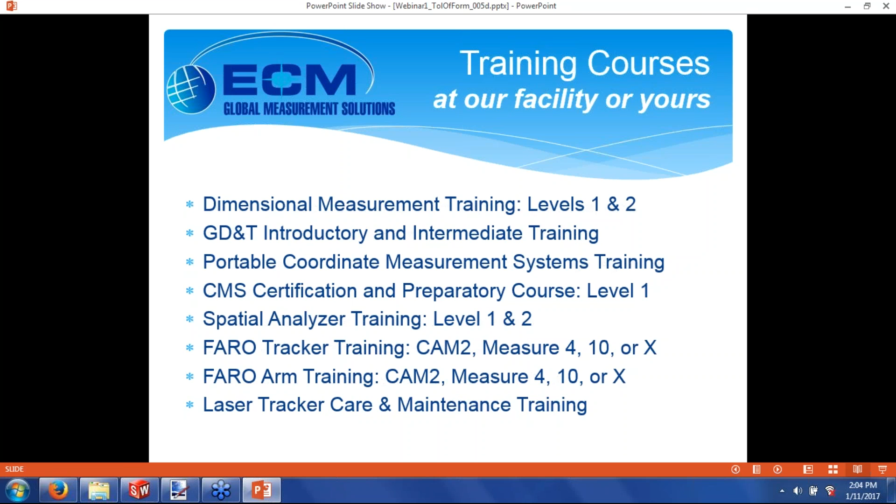Okay, on to the real subject matter. By the end of the webinar, you hopefully will be able to describe the shape of the flatness, straightness, circularity, and cylindricity tolerance zones and the relationships to datums. Quick hint, they shouldn't have any relationships to datums. They are called out independently of datums.

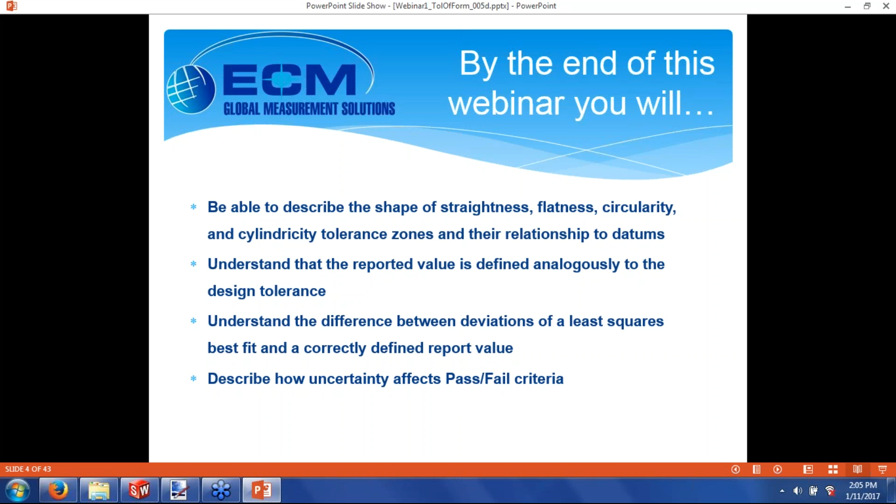Hopefully you'll understand that the reported value, the value we report, can be defined analogously to the design tolerance. Hopefully you understand the difference between deviations of a least squares best fit and a correctly defined report value. And hopefully you'll be able to describe how uncertainty can affect your pass-fail criteria.

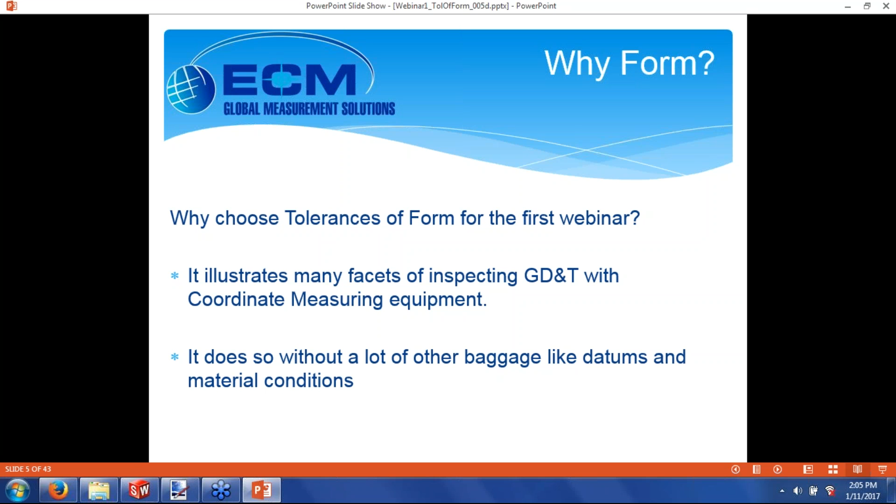Okay, why form? Why choose tolerances of form for the first webinar? It illustrates many aspects of GD&T inspection when you're using coordinate measurement equipment, and it does that without a lot of extra baggage and considerations, datums and material conditions. So we can really just focus on the tolerance zones and measurement.

Another aspect of why form. Why do these tolerances exist? What are they used for? A lot of times they're used for sliding or sealing surfaces. Straightness and flatness, roundness, they all kind of control smoothness to a certain extent, not on the surface texture level, but on a gross macroscopic level.

Important for sliding and sealing surfaces. Parts that mate by insertion. You'd like round parts to be round, so that when you put one inside the other, an oval part might not fit if it's a tight mate.

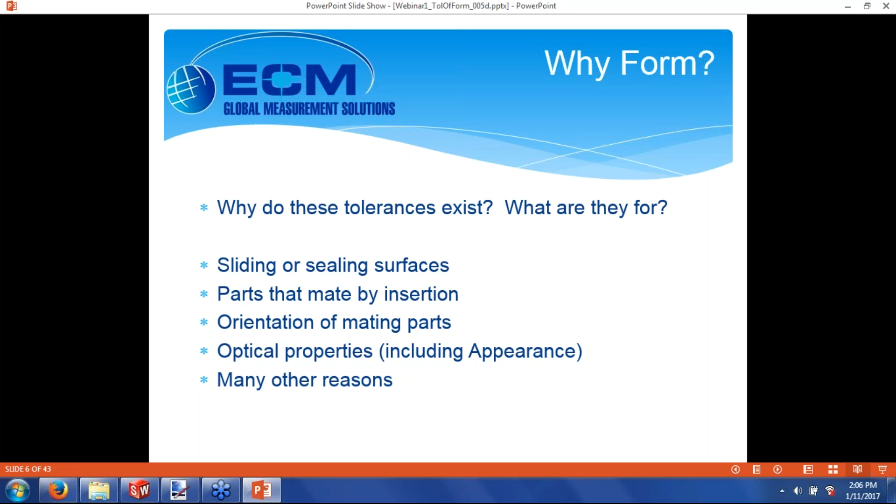Controlling orientation of mating parts. If there's a big bow in a surface that another part mates to, that mating part may be pointed up or down slightly compared to the kind of average surface, and that may not be what the designer wanted. Optical properties. If you're making mirrors, you may want that to be dead flat or have some other shape, and a whole host of other reasons.

Specifications. GD&T is controlled in the United States by ASME Y14.5, 2009 edition.

ISO breaks the subject matter up into dozens of individual specs, and I don't know them all. Functionally, ISO uses pretty much the same symbology that we use for the ASME spec, and the meanings are pretty close to the same. There are some fine differences, but in general, you'll be safe if you interpret a drawing that references the ISO spec.

If you interpret it just like 14.5, reasonably safe. A couple other good documents and specifications: Y14.5.1, that's 1994, is a mathematical definition of GD&T. Really good for people who can do vector math, but there's also some good material in there that may help explain what they were really getting at when they wrote the 14.5 spec.

Y14.43, gauges and fixturing for GD&T. I find this one really useful, particularly for thinking about datuming. It explains how to build gauges, taking into account various callouts you might have on a drawing that you're building a gauge for.

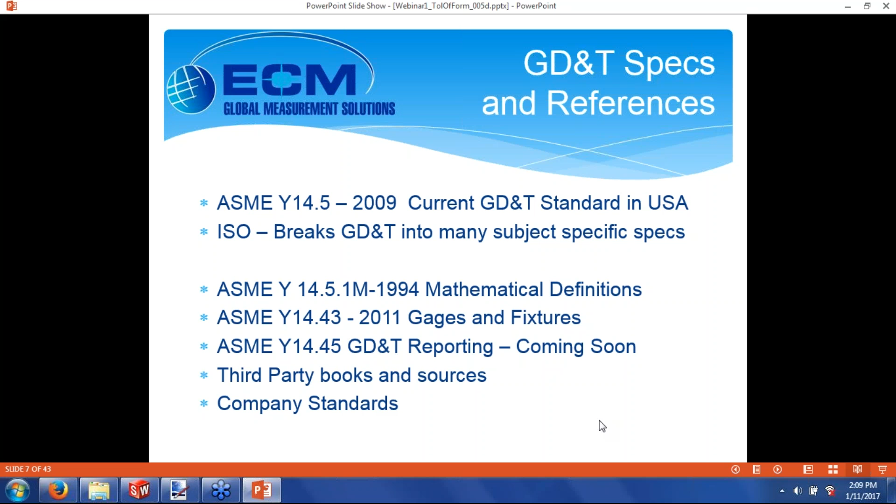Company standards also can sometimes control GD&T. They may have particular uses they want a designer to use, for instance.

Okay, tolerances of form. There are 4 tolerances of form, and we see them here accompanied by their symbols: straightness, flatness, circularity, and cylindricity.

The symbols look kind of like what they represent. The straightness symbol is just a straight horizontal line. Flatness looks like a square plane in an isometric view. Circularity is a nice circle. And cylindricity looks like maybe a shaft being rolled between two planes. That kind of similarity between what you're trying to control and call out and the image is carried through most of the symbology used.

Another note: profile can be used to control shape, but there's a lot more that goes into profile, including referencing datums. We'll talk about that hopefully in a future webinar.

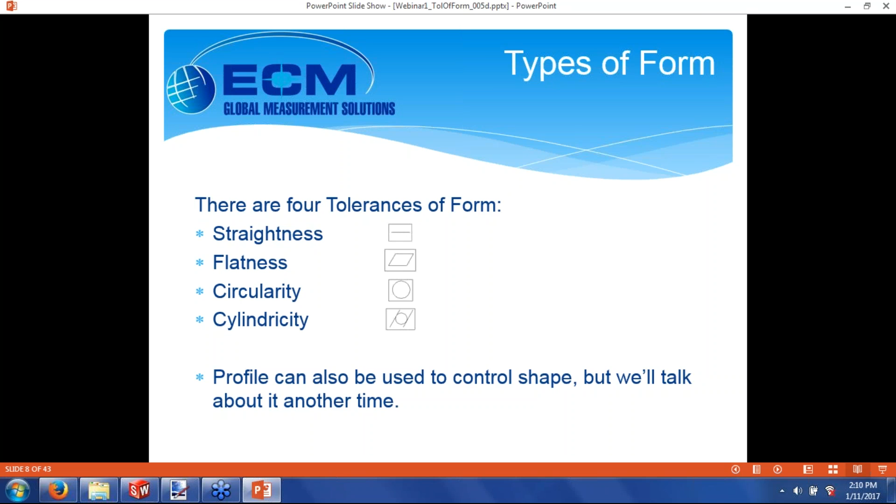Okay, all tolerances of form control shape by establishing an acceptable envelope of deviation, and they're applied without reference to datums. You're just checking the shape to itself.

This makes them particularly well suited for the CMM, because we tend to measure a bunch of points and then best fit, and that best fit is allowed to move in any direction, which finds your measured value without reference to any particular datum. You kind of datum them to the feature itself.

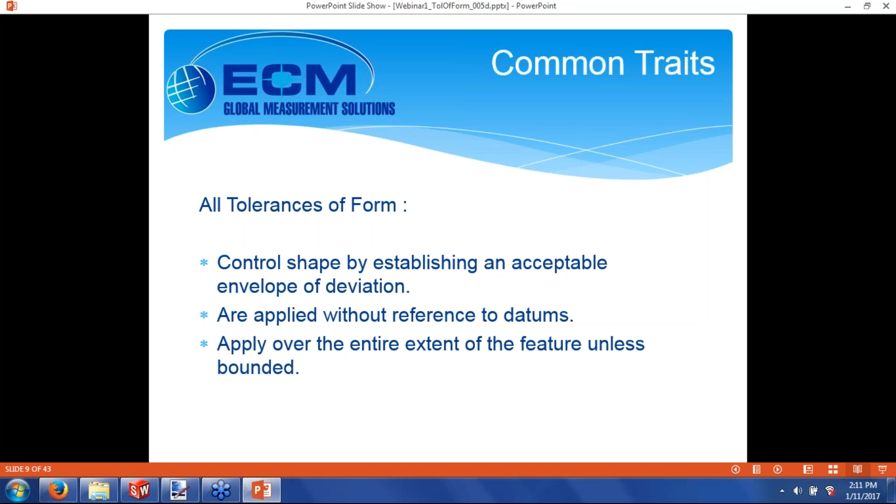And all tolerances of form apply over the entire extent of the feature they're called out for, unless they're bounded in some way.

So hopefully for the designers out there, you'll never write a tolerance of form with a datum attached, as shown in the right-hand view.

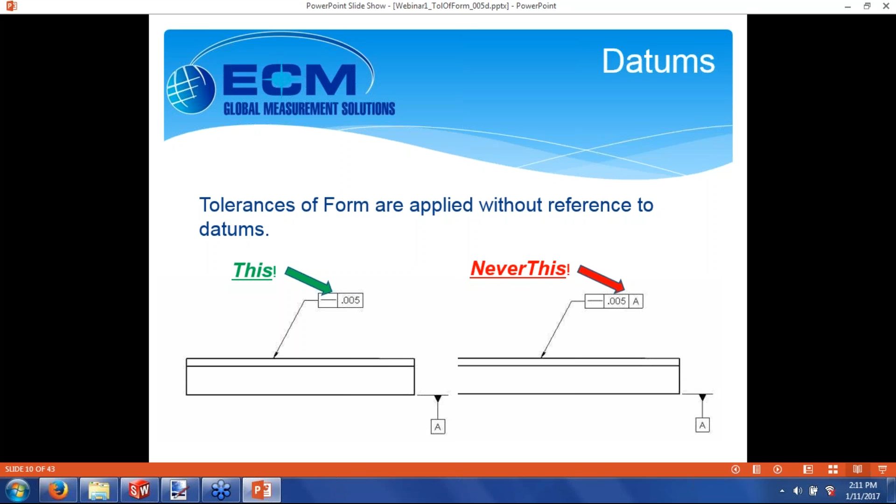And most of the CAD software out there is smart enough to know now that if you're tolerancing form, it's not even going to let you put a datum in.

Okay, by definition, the tolerance zone for straightness lies between two parallel lines in the plane of the view, and this is a direct quote now: where the elements to be controlled are represented by a straight line.

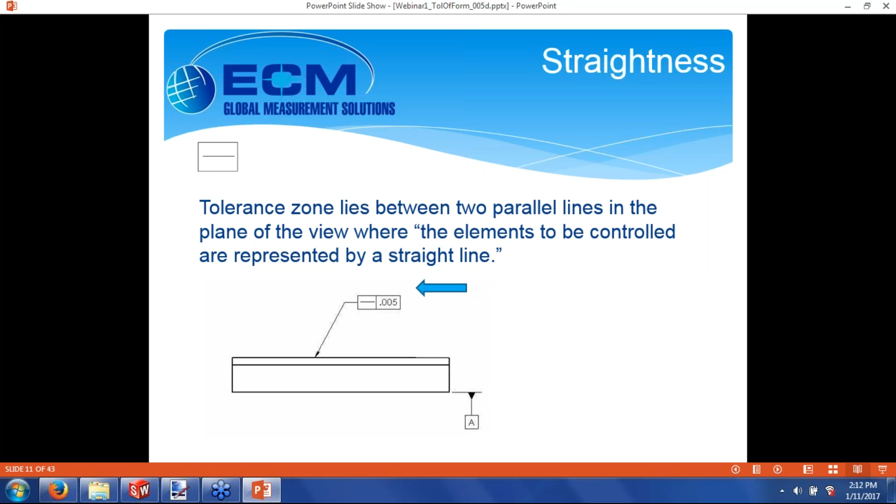So for this, I have a bar here with a chamfer on the edge, with the straightness callout along the top edge.

The straightness applies to each element across the entire surface in question. An element is kind of like a cross-sectional cut. In the case of a rectangular bar, you'd have a number of lines running down parallel to that front face.

Old school, you would take a dial test indicator and run it down the part, look for the minimum and the maximum deviation, and that's what you would record as your straightness.

Similarly, for a cylindrical piece, you'd have an element on the top. Since it applies across the entire surface, you'd have to rotate it, and you'd end up with multiple elements down the length of the piece.

How many elements are in a surface? There's an infinite number. They could be as close together as you could possibly take them. Part of the art of measurement is determining how many are good enough, how many you need to be representative of the part.

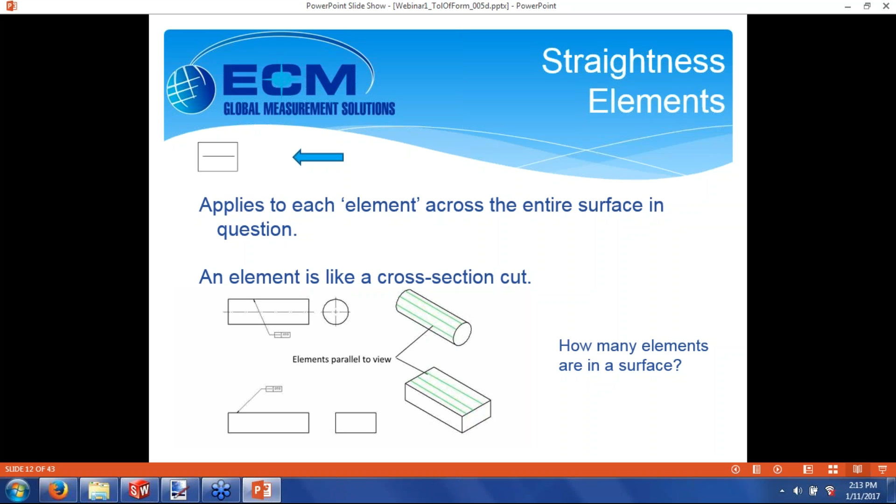Kind of zooming in. We've got our straightness tolerance at 5 thousandths. The tolerance zone is two lines bounded by 5 thousandths. Those lines could tip up or down as you move from left to right. The only requirement is that the actual surface falls within those two zones.

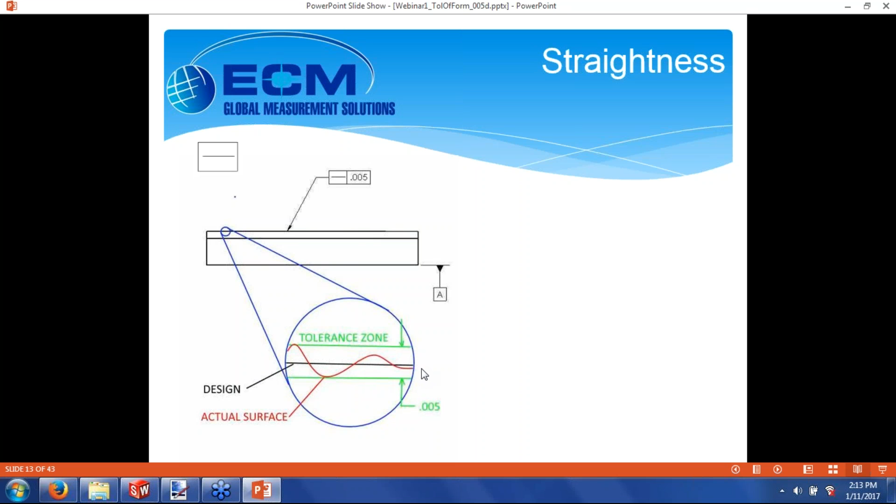Straightness can be applied on a per unit basis. In this image, whereas the callout on the right would apply over the entire feature, this callout per unit length, shown by having the slash and then the unit of length on the right-hand side of the slash, it kind of replaces a note: the part must be straight within 5 thousandths of an inch per every 1.2 inches of length.

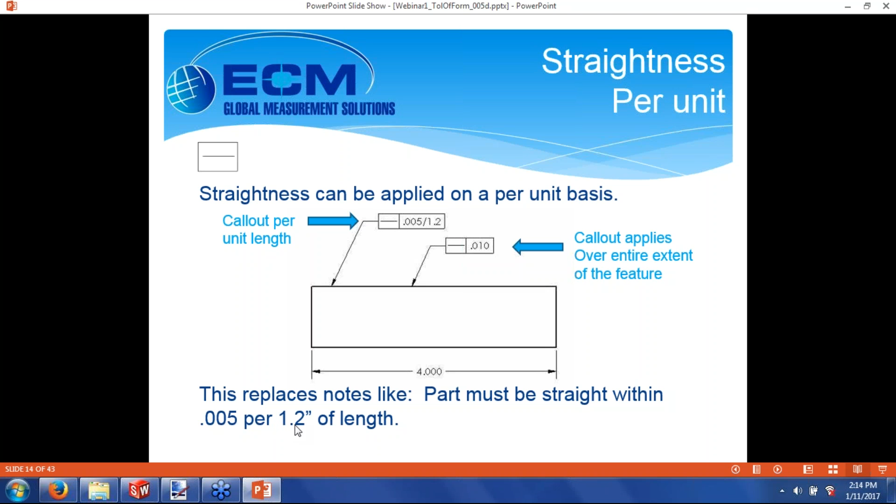What this works out to is you'd subdivide the surface. Every 1.2 inches, you would look at the straightness of each individual segment. Unfortunately, that could be divided any number of ways. Per the spec, you have to look for any segment 1.2 inches long that deviates the 5 thousandths of an inch in order to make sure that a part's conforming.

Software can help quite a bit. Otherwise you'd have to do like a running total of every 3 points you measure.

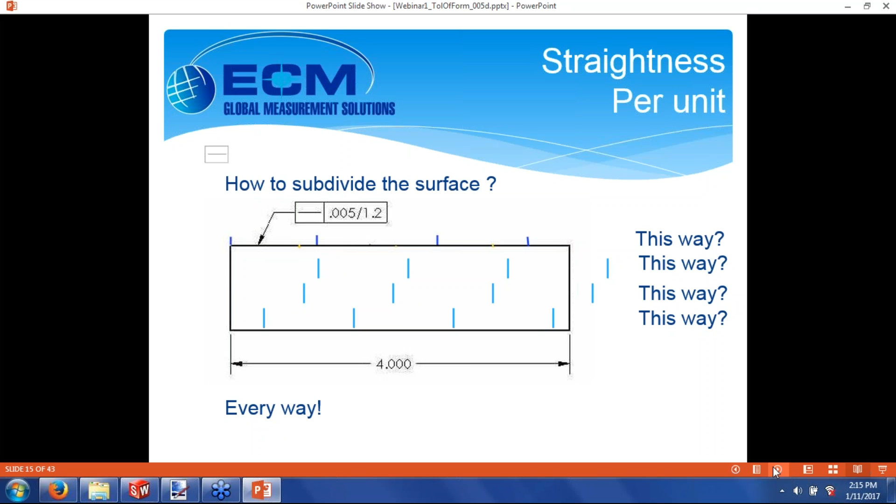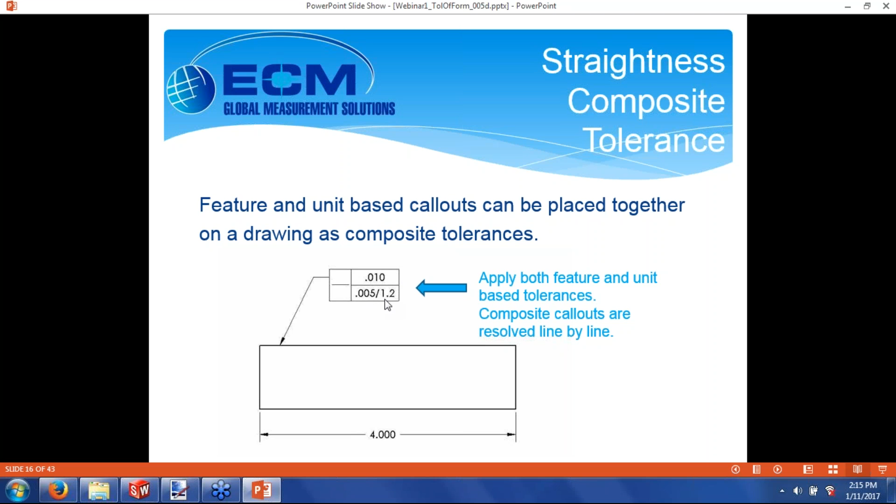Composite tolerancing. Sometimes you can combine a feature and a unit-based callout as a composite tolerance. In this tolerance here, there's just a single tolerance box, a regular tolerance on top and a unit-based tolerance on the bottom. This would mean just about the same thing as called out in the previous slide.

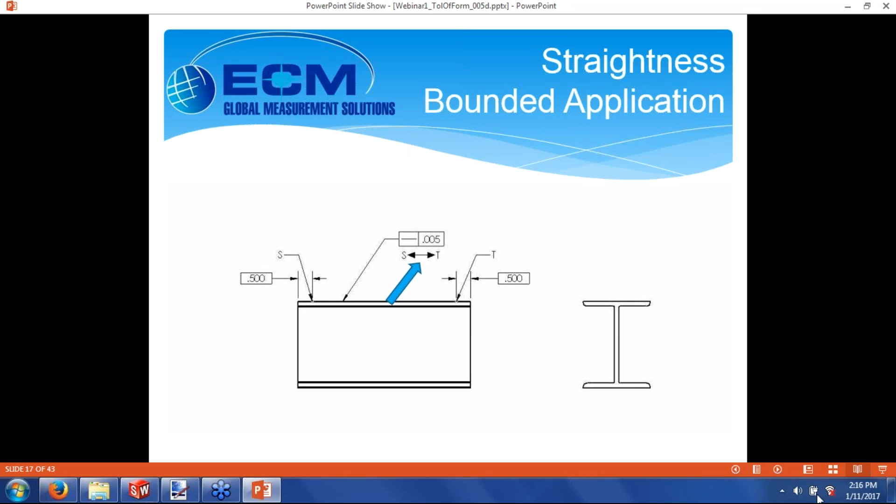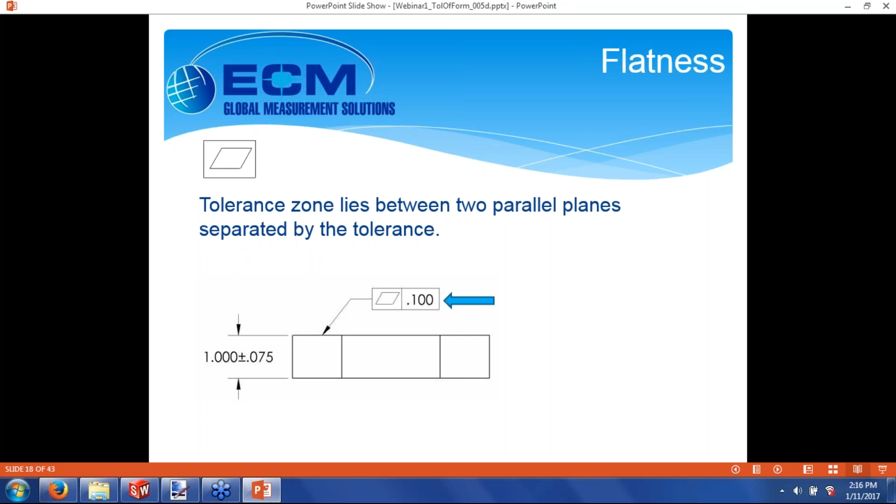Moving on to flatness. The tolerance zone for flatness lies between two parallel planes separated by the tolerance. For this callout, we'd have a 100 thousandths thick tolerance zone. It would lie over the entire extent of the feature. This is our controlled surface.

Zooming in, we have our zone, and the actual part with its variations. In order to conform, its highest point would have to hit that, and then the lowest point would have to be within the bottom tolerance. Again, that tolerance zone is free to move up and down to hit the highest or lowest point. Once you've touched off on one side or the other, it needs to stop.

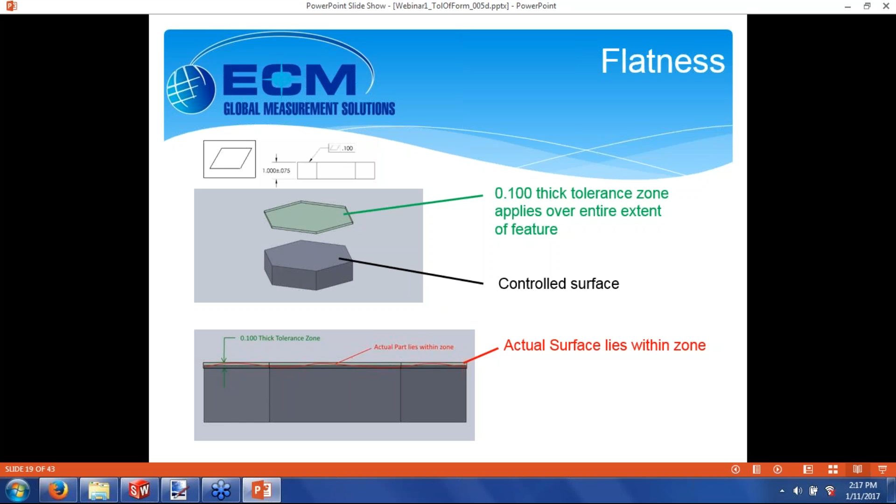It's even allowed to pitch and roll and rotate in order to encompass the surface, but the entire surface has to lie within that box after you're done. In some ways, you can think about flatness as straightness, but with elements running in all directions—longitudinally, across the piece, and even diagonally.

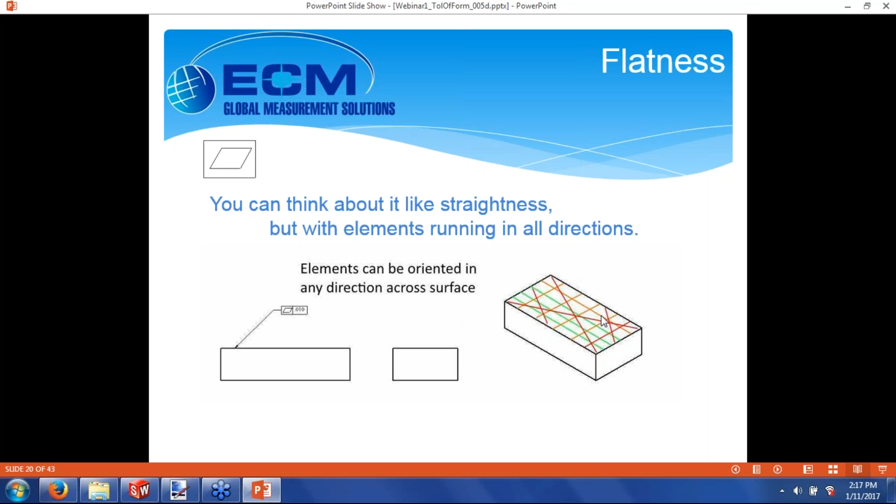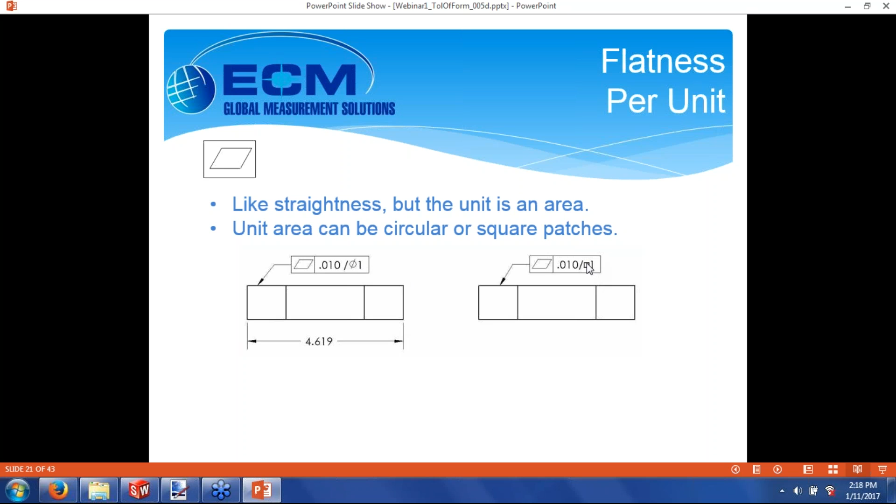Flatness can be applied on a per unit basis, but for flatness, the unit is an area, and that area could be either circular or square patches. Again, you've got the slash and your basic area over which you're going to compare. In this case, it would be a circular area with the diameter symbol, 1 inch in diameter. Over here, I would have a square, 1 inch per side.

Looking at it again, I'd have to consider every circular area 1 inch in diameter all over the face of the part and search for a ten thousandths deviation in any of those. The same with a square—I'd have to be able to pick any square and have it pass that ten thousandths criteria.

One way to shortcut it: if the part is good and over the entire extent of the part it meets that spec, you don't have to try to break it up into small areas, because if the entire surface meets that spec, naturally any subsection of that surface would also meet the spec.

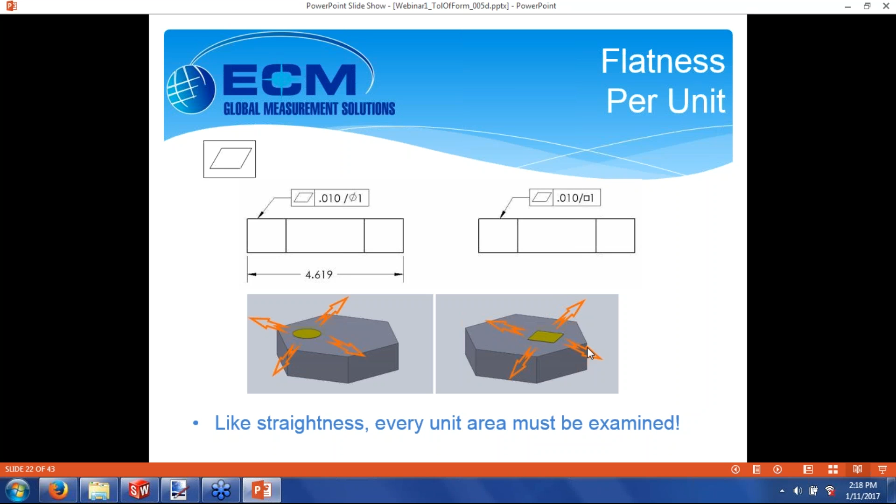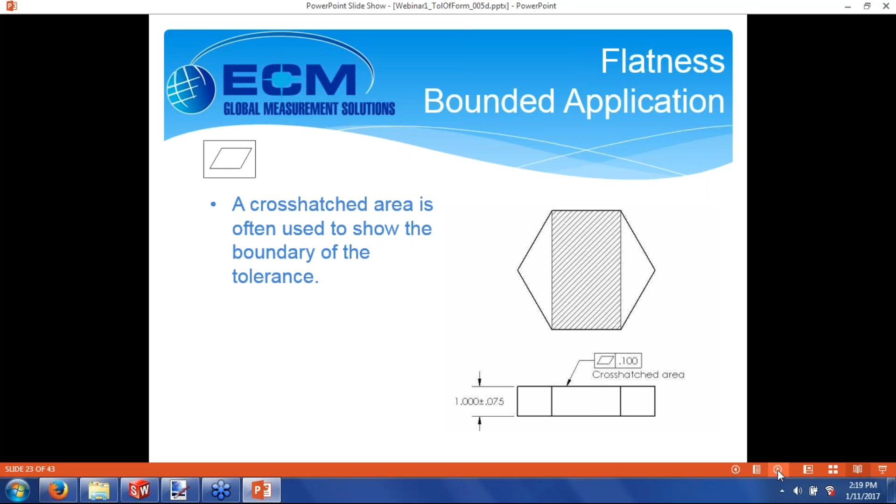Circularity. The tolerance zone is defined by 2 concentric circles, separated radially by the tolerance. That's not the difference in their diameters, it's the radial difference between them. So my outer diameter would be 2 thou larger than my inner diameter in this case. You're looking at elements again. For circularity, the elements are perpendicular to the center line, so you get nice round sections along the length.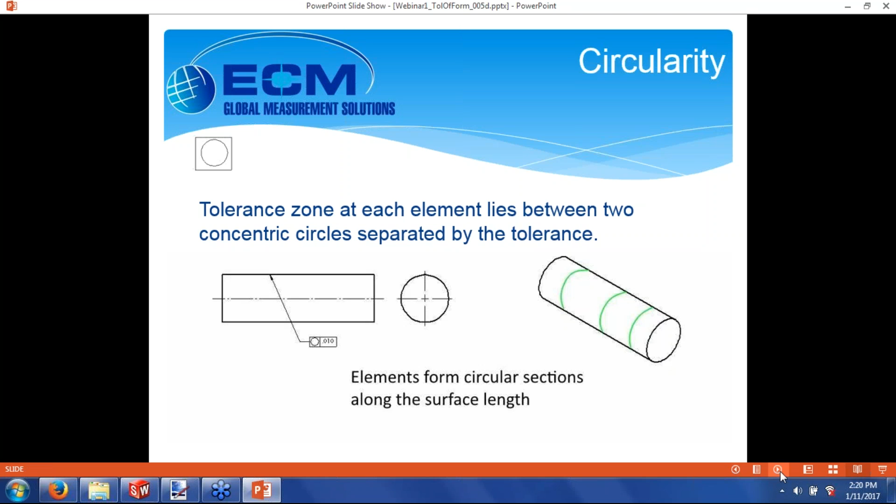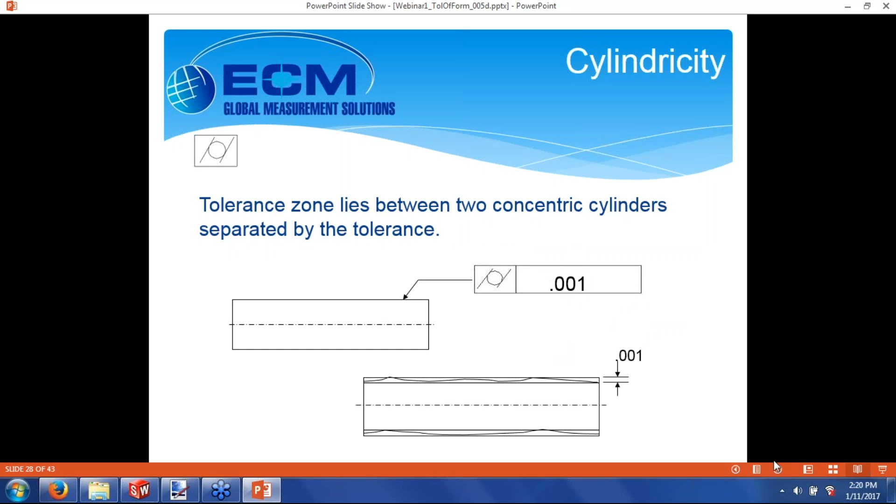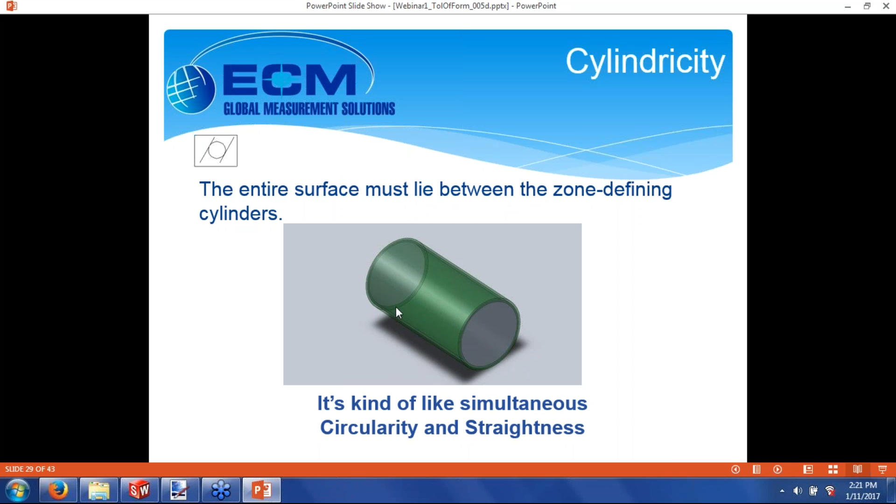Cylindricity, the tolerance zone lies between 2 concentric cylinders that are separated radially by the tolerance value. So you end up with these concentric cylinders, a green zone, and the entire surface of the gray part must lie between those. It's kind of like a simultaneous circularity and straightness. For a cylindrical part, circularity would not control, say, the part coning very well. It doesn't even control bow on the part, because you're looking at the local center line at each element. So, yeah, cylindricity is really what you need to control a cylinder.

Okay, so that's just a quick look at the different tolerance zones for form. Now we'll talk a little bit about measuring flatness.

It looks like I'm dragging a little. I may run just a little over, but I'll try to catch it up.

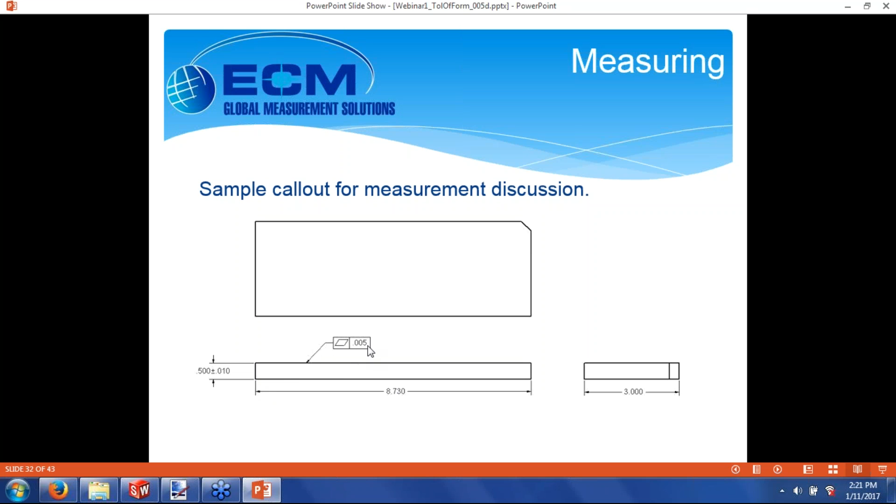So here we have a sample callout. We'll use this example throughout the rest of the measuring section. We've got this bar, 8.730 long, half an inch thick, plus or minus 10 thou, with a flatness of 5 thou called out on the top surface.

Approaching any measurement job, the first thing you need to do is plan your measurement. There's a whole host of factors I'm not going to talk about. Just a real quick note about number and distribution of measurements, and technique can affect that. For instance, in this right-hand picture, if I was using the dial test indicator, I'd be taking stripes down the part and across the part. Over here, if I'm looking at planning measurement for a CMM or a drop indicator or height gauge, I'm going to have individual points.

An even distribution is usually best. For instance, if I crowded a bunch of points down at one end, and then I best fit through there, these points here may have an unusually large looking deviation. Trying to distribute your measurements evenly will kind of head that kind of bias off.

There's no hard and fast rule for the number of points. Obviously you want to take enough points to accurately characterize the part. You don't want to take so many points that it takes you 3 weeks to measure flatness. So the number of points you take is going to depend on your tolerance, the size, and the part quality. If you've got a really good part to begin with, you can probably take fewer points. If you've got a part that is a problem, looks bad, you're probably going to have to take more points to accurately characterize it.

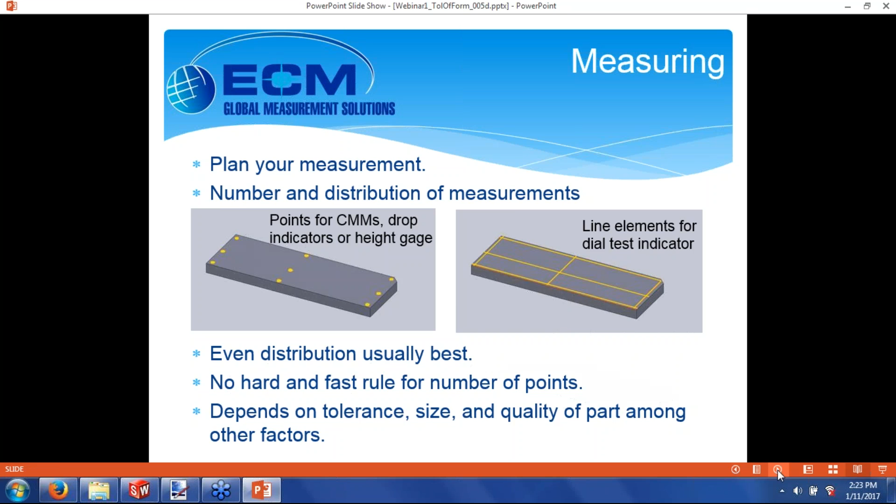Measuring conventionally on a tabletop with, say, a dial test indicator, a drop indicator, or a height gauge, setup becomes really important in this kind of application. The instruments typically are referencing 0 from the granite tabletop as a datum plane, and if there's a long bow to the part and you're not set up parallel, then you can see a significantly higher deviation from one end to the other than you would if the part was more nearly parallel to that basic table.

One good way to do that would be to support the part on just 3 points. Points should be well spread across the part, maybe 2 at one end and 1 on the far end, near the center, to kind of level the part out before you begin measuring.

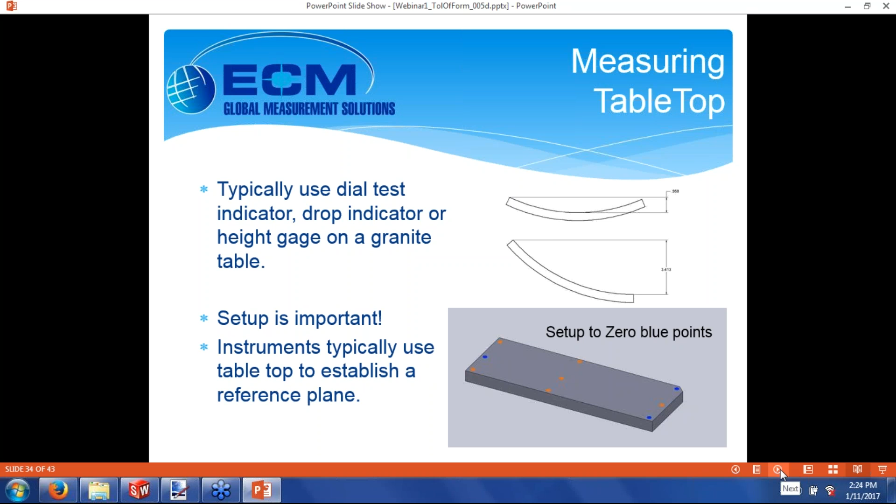Now, one thing that may have a minor effect, enough to throw you off. Most software uses the least squares best fit, which minimizes the sum of the squares of the deviations. Then we look at the maximum and minimum deviation from that least squares best fit plane, take the difference between them, and declare that to be the flatness.

But GD&T wants the deviations, not the square of the deviations, minimized to determine the measured value of flatness. If you've got a really good part, the difference between minimizing the squares and minimizing the deviations is really small and almost negligible. If the part's not so good, you may be able to manually adjust the angle of that plane to get a slightly better answer.

New software GD&T functions are getting better and better at doing this. Spatial Analyzer is one company I've talked to about this quite a bit. Their basic methodology is to solve a least squares best fit plane, and then the software has some algorithm for tipping that plane and finding a slightly smaller flatness value.

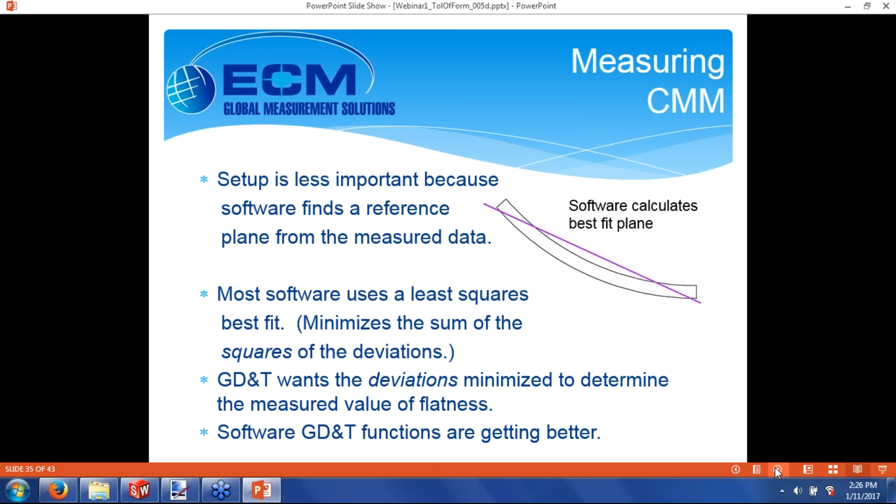Okay, reporting. Y14.5.1 is the document, the mathematical definitions document. That's what actually defines the measured value of flatness, as the smallest flatness tolerance to which the surface will conform. Similarly for straightness, circularity, and cylindricity, it's the smallest tolerance of whichever type to which the feature will conform. That definition almost makes us have to go find that smallest value.

In a tabletop setup, that might mean zeroing on a couple different points, and then taking our measurements again. In the case of CMM measurements, it might mean actually having to manually tip the plane, or using the GD&T software to do that for us.

One thing about using software, I really recommend that you test it. The software gets better all the time, but in the early days of GD&T, I used to feed sample point sets to different software, and sometimes I was appalled by the results. They've gotten much better over the years, but I highly recommend testing so you know exactly what you're getting.

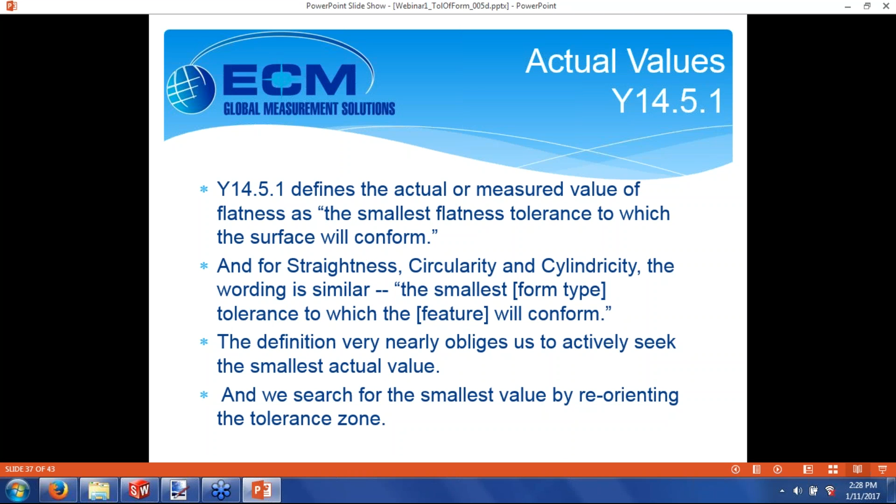Okay, where did I get off track? We search for the smallest value by reorienting the tolerance zone. Now, Y14.45 is a little more practical, and again, that's the brand new spec, hopefully coming out this year, about reporting on GD&T. It defines 3 different levels of reporting. Type A is pass-fail.

Type B is a single number which would describe the worst case, and depending on the type of tolerance that's called out, that can be an interesting process. For profile, the process is really complicated to get that single number. For form it isn't bad though, and what we do most of the time, taking a best fit feature and then looking for the maximum deviation, is perfectly adequate.

Type C again uses that single type B number, but supplemented by additional data. And in the CMM world, whether portable or stationary CMMs, we've been doing that for a long time with whisker plots and color plots of deviations for features.

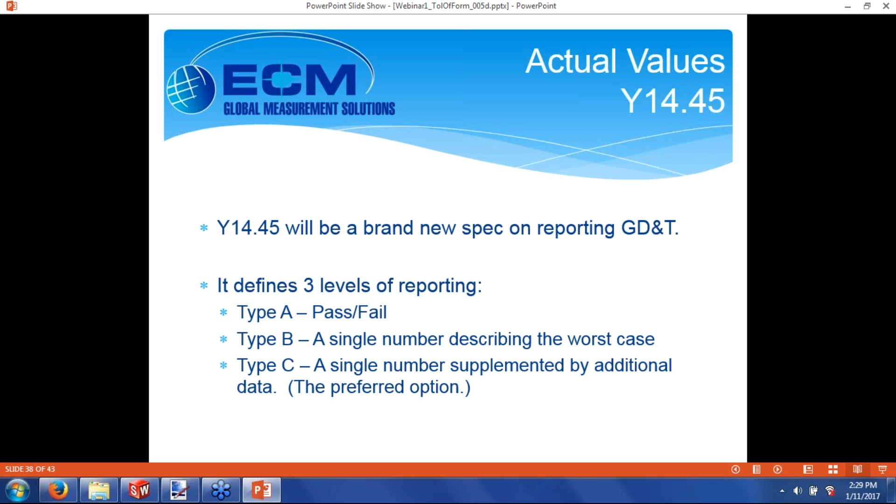Okay, uncertainty. Y14.45 notes that uncertainty should be considered when deciding if a feature meets its GD&T tolerance, but it doesn't tell you how to do that, just that you should consider it.

ISO has a spec which requires you to subtract your uncertainty from the tolerance band. It's most easily talked about in terms of length. If I had a 5-inch bar, plus or minus 5 thousandths, and I'm measuring it with a pair of calipers that have an uncertainty of 1 thousandth, I would have to subtract that 1 thousandth from the 5. I can only say the part passed if I was within plus or minus 4 thousandths.

This can make it hard, especially if you're doing tight tolerance parts, around 1 or 2 thousandths tolerance or less. I've heard rumors that ASME is considering a similar spec. If anyone knows for sure about that, I'd appreciate it if they would chip in with a comment, because that's going to be important for a lot of people.

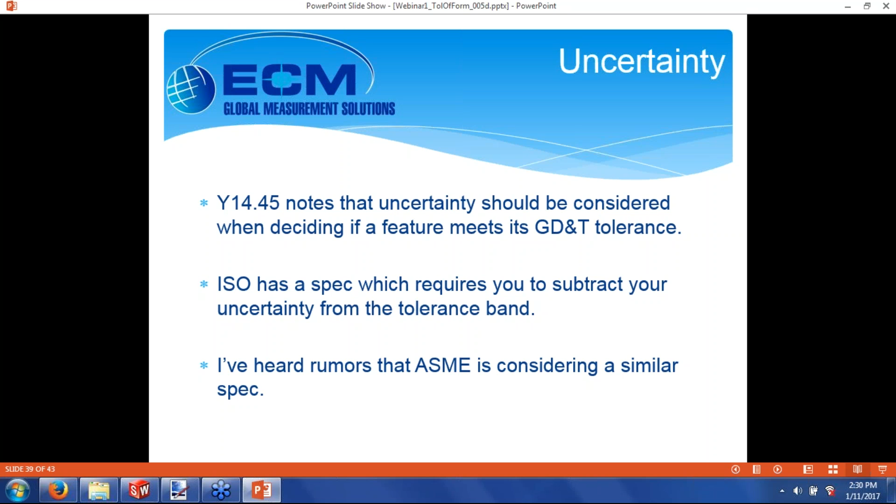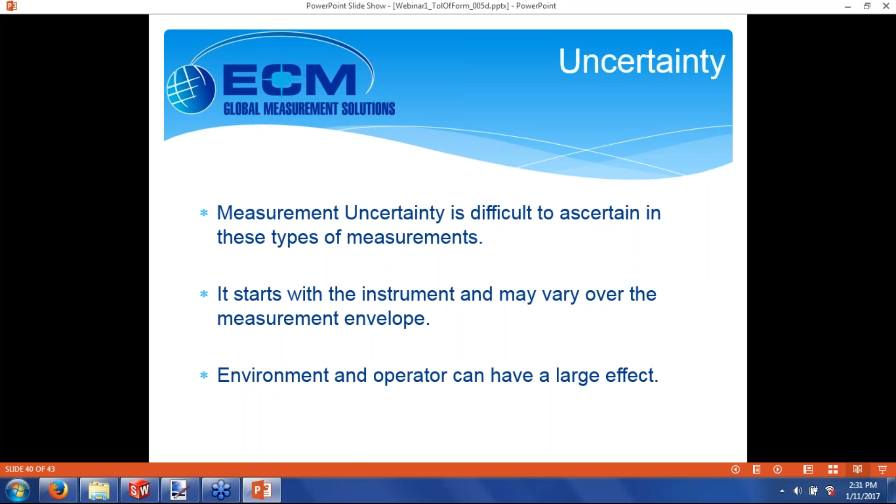Measurement uncertainty is difficult to ascertain with these kinds of measurements, particularly with portable CMM equipment like arms and trackers. Your uncertainty starts with the uncertainty of the instrument, and that may vary over the measurement envelope. Environment and operator can have a large effect, and it can vary over time if your environment changes.

And that's just for determining the uncertainty of individual points. Then we combine the point measurements to create average best fit features. The statistics are too complicated for me. The key thing is use good measurement practice, try to estimate your uncertainties, and then you can be prepared to defend close pass-fail calls.

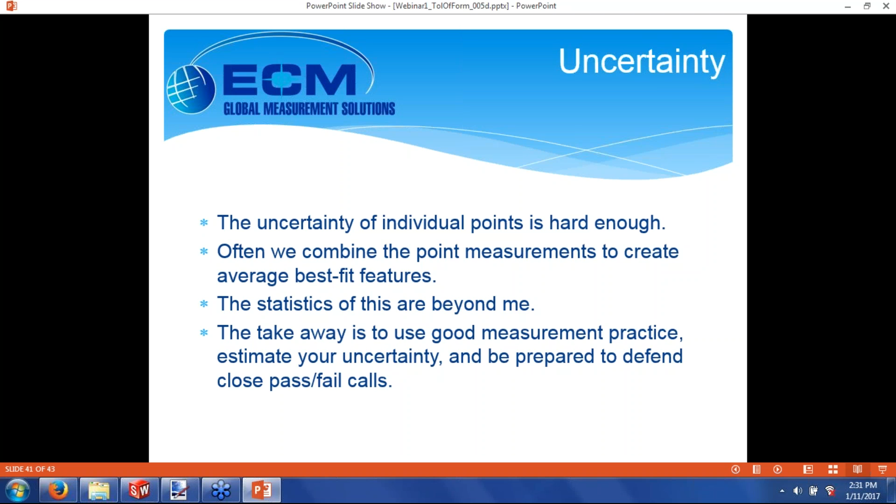That's the end of the formal part of the presentation. I'd be happy to do questions and answers now. I thank you for your attention and hope it was worthwhile enough that you'll come back for another one.